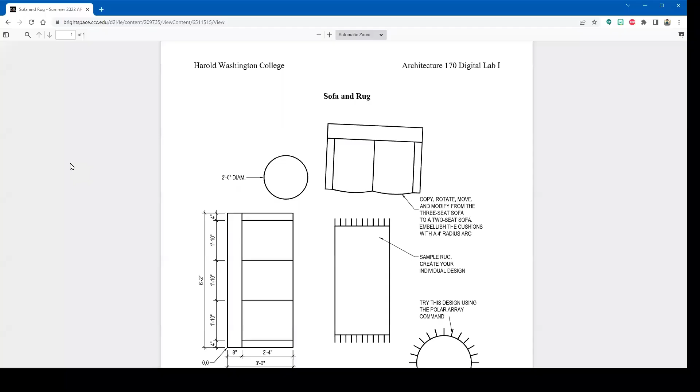The assignment I'd like us to start with is this one, the sofa and rug. My focus is going to be first on this 3-seat sofa. Based on the dimensions of the 3-seat sofa, I'll show you how to copy and edit so you can generate the 2-seat sofa. And then putting in this round end table is straightforward enough.

Being able to put in this rug, I can show you how to do that, but I'd like you to maybe think about a design you want to come up with. And then this one here, I just want to show you how you can use the polar array command for that. So this is the drawing we'll begin with.

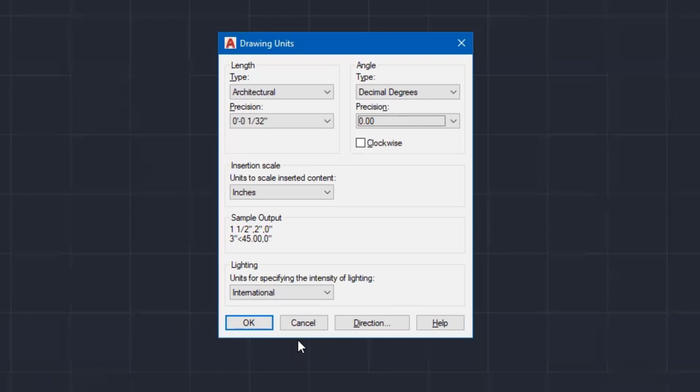Now that we have formatted the units, you'll see down in my drawing aids and my coordinates, it is now showing feet and inches. The next thing to do is save this file as, giving it a file name.

So I will go to my application button, click on it, click on Save As, and I'd like to save this as a drawing. So I click on drawing. It's taking me to my Documents folder. I have an HWC folder, I'm going to double click it. I have an Architecture 170 folder, I'm going to double click that.

I have an old drawing sitting in there, and that's fine. What I'll do now is come down to my file name, click in there one time and provide the file name. Remember, every file will start with your first initial last name. So first initial last name, and please use your first initial last name, not mine. First initial last name space, and this drawing is called Sofa and Rug.

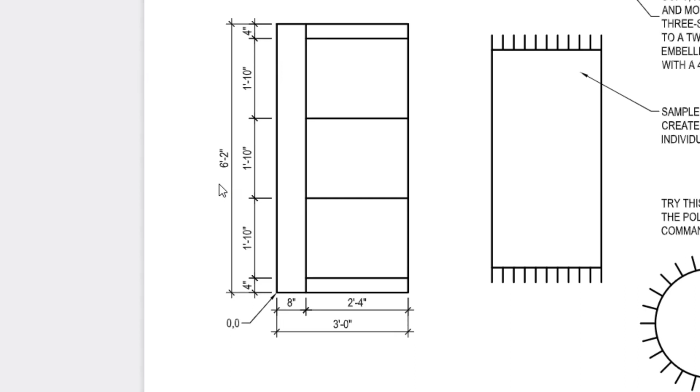So I'll go back to my AutoCAD drawing and begin by constructing the first line. I go to the Home tab, Draw Panel, and click on Line. When I click on Line, it's asking me to specify the first point. And if you notice on the drawing that I provided you, you'll see where it says to begin this drawing, right here where my X and Y are equal to 0.

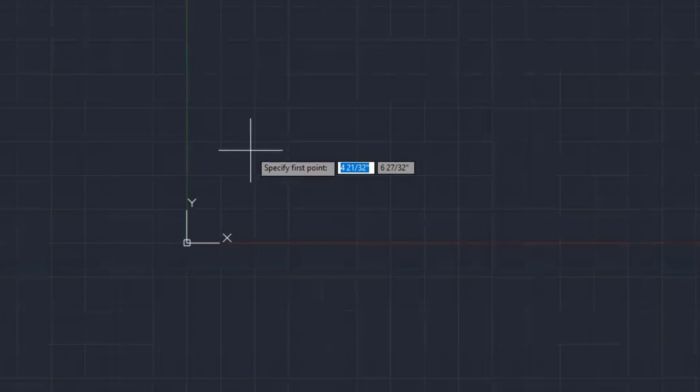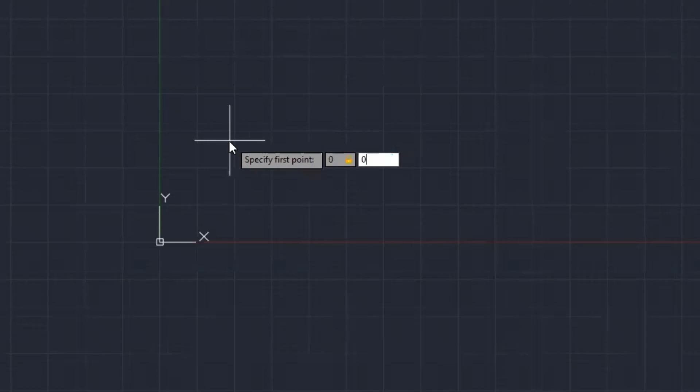That's my point of origin, so I want to make sure that the line begins at 0,0. So when I go back to my AutoCAD drawing, it's asking me to specify that first point, and I'm going to type in the values. So I'm simply going to type 0, comma, 0. I'm being explicit here and indicating to AutoCAD that I want that first point to begin at 0,0. So now I enter, and it guarantees me that the first endpoint of this line is at that point of origin, 0,0.

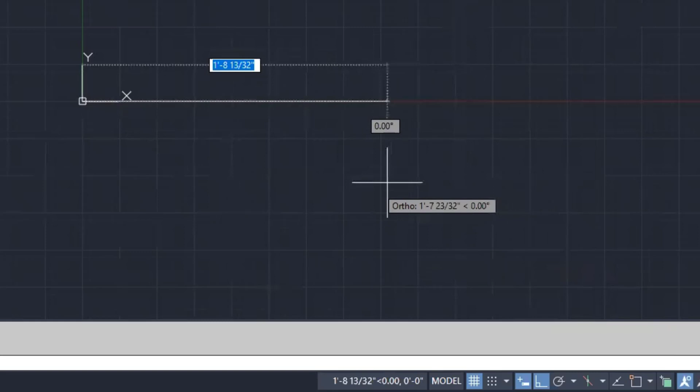The next thing I want to do is draw the line 3 feet in length, and I want to make sure that it is perfectly straight. So I will go down to my drawing aids and toggle my ortho mode on by clicking on the icon. When I click on the icon, it turns blue, meaning it's active, meaning ortho is on. As I move my cursor, you'll see that it moves horizontally no matter where I place my cursor. Now if I come up here, it will go vertical, but it is locked into either a perfectly vertical line or a perfectly horizontal line.

So I'm going to start with my horizontal line here first. And you notice as I move my cursor along, it's updating the distance. When that distance appears to me in the window there and it's highlighted, that means I can go ahead and type in the value. So I want to make sure that this is exactly 3 feet in length.

So I type in 3, and I make sure to use my apostrophe to indicate that it's 3 feet in length. If you do not do this, it's going to draw a line that's 3 inches, and that's going to be detrimental to what you're trying to accomplish. So make sure it is a 3-foot line. So I type in 3 feet and I enter.

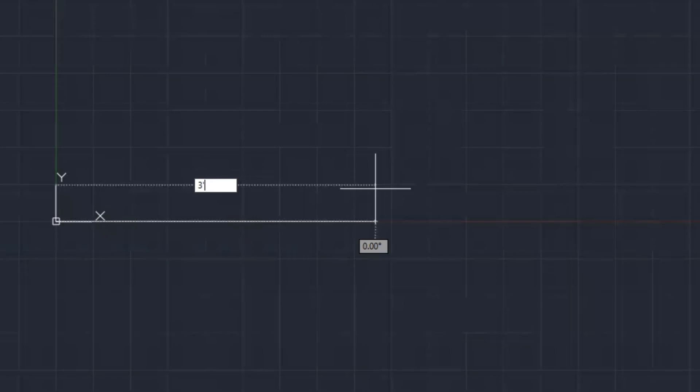And you'll notice that it almost falls off the screen. Maybe on your screen, if you didn't zoom out far enough, it probably did fall off. Don't worry about that—all you need to do is enter. It terminates the command, and you can go ahead and pan the drawing and zoom the drawing so that it is on screen like mine. And now we can begin the next line.

So I go back to my example. The next line I'd like to draw is the one that is 6 feet 2 inches in length, and it will also begin at 0,0. So I go back to my AutoCAD drawing, and I'd like to draw another line.

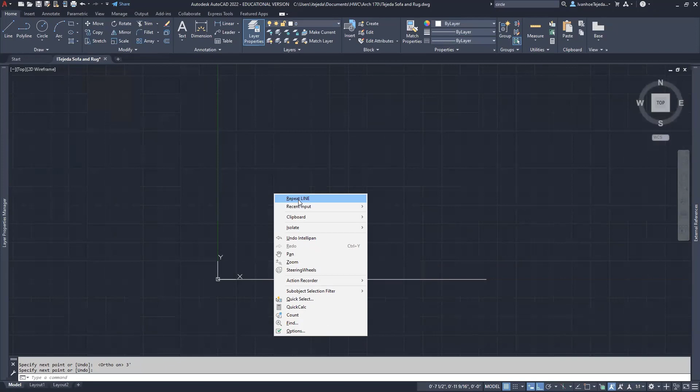Now remember, if I right click, I can go ahead and repeat the line command from here—I don't have to go back to the icon. So I can click on repeat line. It asks me to specify the first point. I'll go ahead and type 0,0, even though there's another way of doing it, and I'll show that to you later. So I want you to practice this—go ahead and type in 0,0 and enter.

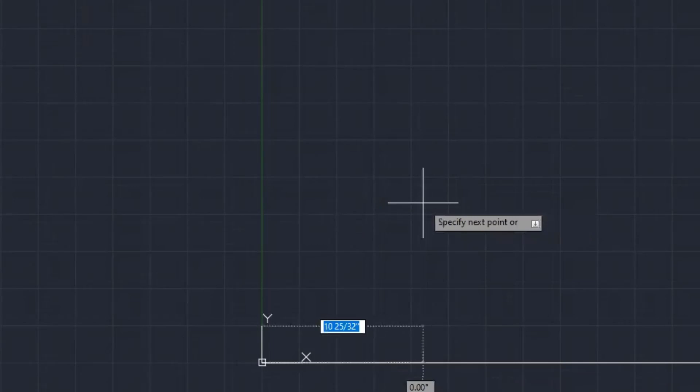And then take your cursor so that it is following that green axis, which is our y-axis, and just take it up. You don't need to take it all the way up or approximate that 6 foot 2 inch length. As long as it's going in that direction and you have ortho on, all you need to do now is type in 6 feet 2, and then the quotes for inches—6 feet 2 inches, no space in between—just like that, 6 feet 2 inches, and enter.

And you'll see how mine falls off screen. And that's okay. I'm going to enter to terminate the command.

Now what I'm going to do is zoom out and pan this down until I see that entire line on my screen like this. You also have the option of zooming to the extents of your drawing. So I can type Z, enter, E, enter, and that shows me the extents. Then all I have to do is roll my wheel mouse down one time, and I get the same results.

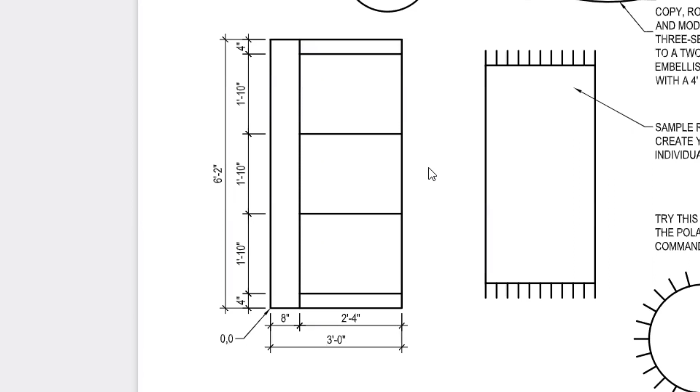All right, with the 2 lines in there, let's go back to our example right here. The next thing I'd like to do is basically complete my outline of the sofa. So I need to construct 2 more lines, but I'd like to introduce some more commands, start to really get into AutoCAD here. So let me go back to AutoCAD.

In AutoCAD, we try to copy as much as we can and then edit. There's no need for me to draw another line. I can simply copy one of the existing lines. So what I'd like to do is copy this line right here over 3 feet this way.

Now I'd like to take advantage of my object snaps. So I'm going to pause for a moment. I'm going to come over here to my drawing aids, and right here where it says object snaps, I'm going to click on the down arrow next to it. First of all, I want all of you to make sure that you have, at the very least, endpoint, midpoint, and intersection checked on.

You check them on basically by clicking on them. So if I wanted to, let's say, turn on perpendicular, I would click on it, but I don't want that, so I'm going to turn that off. So intersection, midpoint, endpoint - make sure you have those. Mine are already set. So the next thing I'd like to do is go ahead and just simply click on the icon itself like this to turn that on.

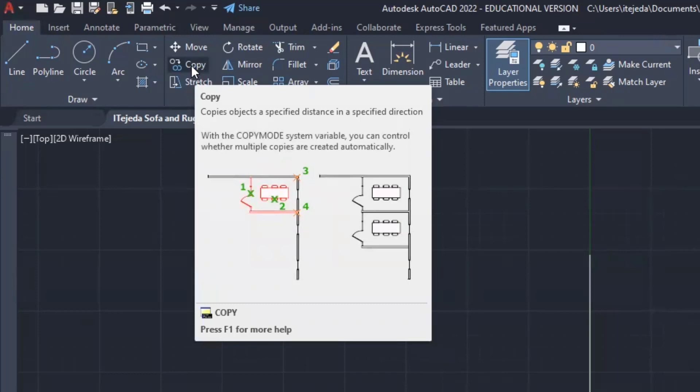All right, we'll go back to my drawing, and I will proceed to make a copy of the line. So from my Home tab, Modify Panel, I come over here to Copy. That tells me that it's going to make a copy of an object from one location to another. So I click on Copy, and then I hover my cursor right here on the drawing screen, and it says Select Objects.

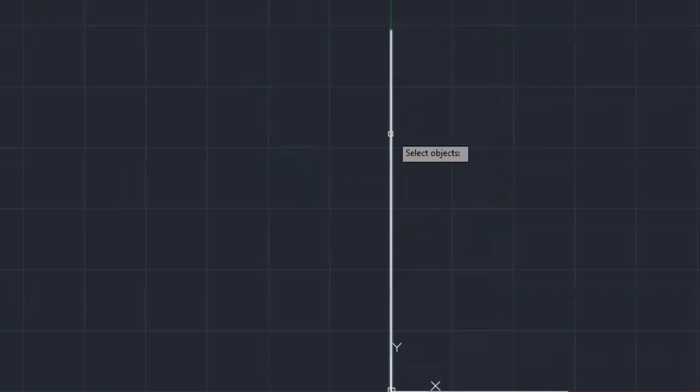I only want to select one object, and it is this line. So I'm going to click, or actually hover over it and see how it highlights. Now that it's highlighted, I can go ahead and click on it. So that is now selected. And if you look down at the command line, it says you have one object selected, right? One found.

All right, that's it. AutoCAD gets stuck in this loop here, wanting me to select additional objects, and I will eventually be selecting more than one, but for now, this is it. I ask you to, in your mind, just say, do I want to select any more objects? And if the answer is no, then enter. So go ahead and enter now. And once you enter, it advances us to the next step.

It's telling us to specify the base point. So for the base point, I'm going to come down here. Notice how if I just hover, it actually has this magnetic effect, and when I hover, it snaps to that endpoint. Once I see that happening, and by the way, it's a square, it's the green square there, I go ahead and click one time because that's going to be my base point.

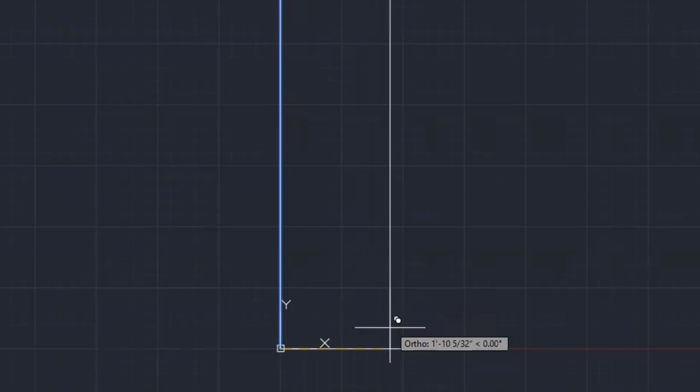Click. And now I'm prompted to specify the next point, the second point. I will simply come over here, hover, hover, hover, and then come really close to that endpoint and let it snap to that endpoint. Once it snaps to that endpoint, it indicates to me that it's the endpoint, and it also has the green square. I can go ahead and click.

Done. It's made a copy. But as you can see, it wants to stay in this mode, and it wants to allow me to make additional copies, but I don't need any more. So I'm going to enter to terminate my command. Done.

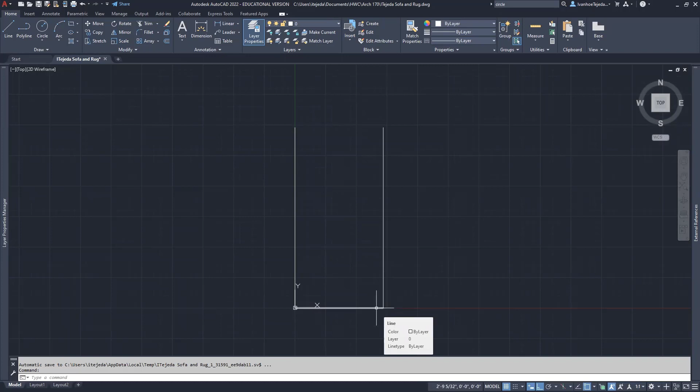I will now proceed to copy this line, the 3-foot line, up to the top. Now, yes, I can draw another line.

Simple and straightforward. I can come over here, right click, and go to recent input, and you'll see that I have the line listed there. So I can click on line and simply draw a line from one endpoint to the other, then right click and enter to terminate the command.

Yes, that is possible, but I'm going to undo that because I want to practice the copy command one more time. There are multiple ways to complete drawings in AutoCAD. With this exercise, I'm introducing you to commands, and then you can practice using different commands with other drawings, and you'll establish your own drawing style.

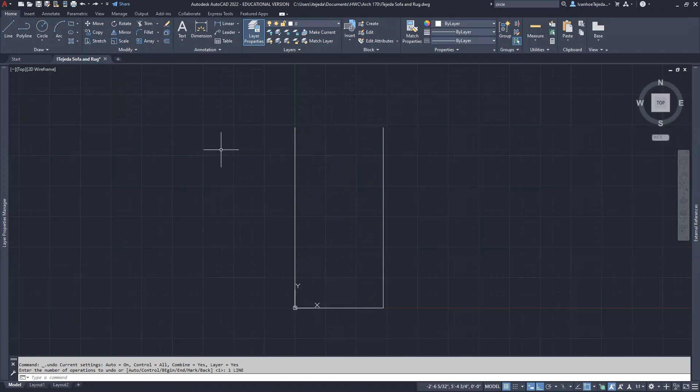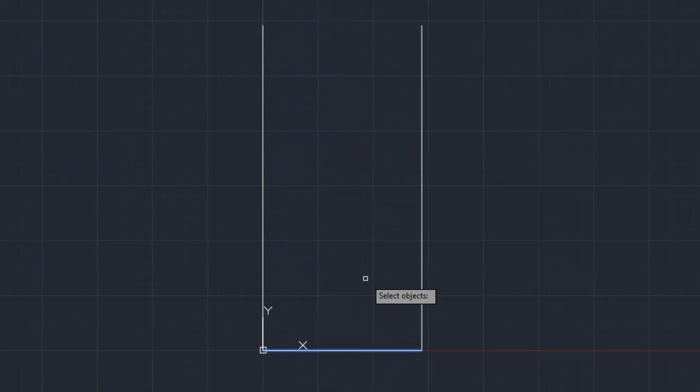So I'm going to right click, recent input, copy. Now I'm prompted to select the object, so I hover over this line and click on it. Do I wish to select any more objects? My answer is no, so I enter. Now, once I enter, I'm prompted to specify the base point.

I will use this endpoint as my base point. Click, take it up, and then click on this endpoint as my second point. Notice how it's still in the loop in case I wanted to make additional copies, multiple copies, and I don't, so I enter to terminate the command. And I now have the 6'2" by 3-foot outline of my sofa.

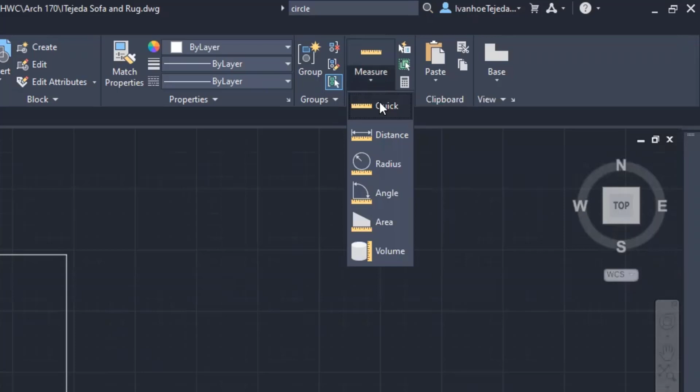To verify this, stay in the Home tab, go to the Utilities panel, and in the measure dropdown, click on that. You'll see there are a few ways to measure your objects. I will select quick.

I'm going to click on it, and when I do that, you notice my cursor changes. As I move over to my 4 lines, it's starting to give me some quick measurements, indicating that it is 6'2" in that direction.

Now if I take my cursor and place it inside of the rectangle, you'll notice that it's showing me the 3-foot width by the 6'2" length. At the 4 corners, it is showing me that they are all at right angles. That means I've drawn this properly. Once I'm done checking that, I can go ahead and escape.

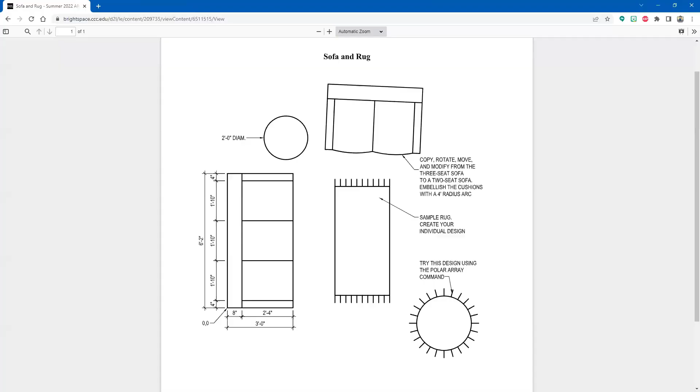Now I can proceed to the next part of the drawing. So I'll go back to my example, and let me zoom in and pan this down a little bit just to focus on that one area of the drawing.

So the next thing I'd like to do is put in that backrest, and that backrest is 8 inches away. That's my focus right now, so I'll go back to my drawing.

Now what I'd like to do is pan and zoom in a little bit, not too much. Actually, I went too far, let me zoom it back out. I can't seem to get it in the middle, so I guess I'll leave it right there. But I really want to zoom in, so watch what I'm going to do.

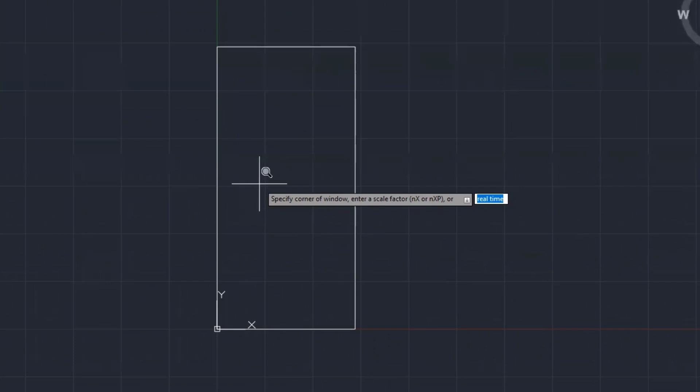I'm going to type Z and enter. Instead of doing extents, there's an option called the window option. By the way, the options you see down at the command line, I can also use my down arrow right now, and it will list them for me right here. And I can click window from here.

So I click window, and it says specify the first corner. So I basically want to say, zoom from here, and I click one time. I move my mouse, then click over here because that's how far I want to zoom in. That's another option you have in terms of zooming.

I'll add the line that's 8 inches away from the back. I could make a copy of this line and bring it over 8 inches. And you know what, I think I'll do that because I still have an opportunity to show you the offset command in just one second. So yes, that's what I'll do.

I will go ahead and go to the Home tab, Modify panel, Copy. So I will click on Copy. It asks me to select the objects, I select the line. Do I want to select any more objects? The answer is no, so I enter.

I can now establish or specify the base point. For the base point, I'll go ahead and click right here. I don't need to click on the object like I did before, I'm simply going to make a click right here, one click. I still have ortho on, and I want to copy it over a distance of 8 inches. So all I have to do now is type in 8.

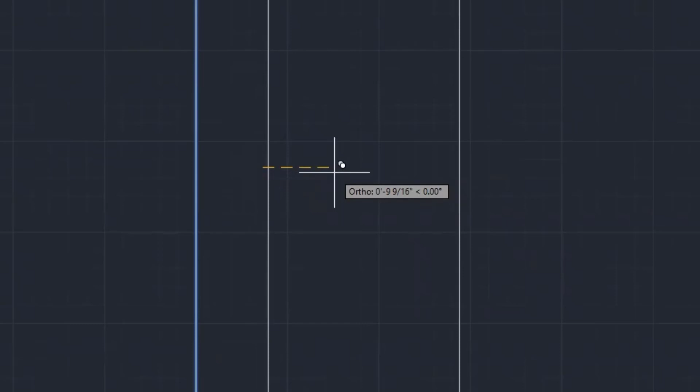I could put the inch mark, but AutoCAD will default to inches if I don't put anything, so I'll simply leave it at 8 and enter. I've copied the line over 8 inches. Now it's assuming I'd like to make additional copies, which I do not, so I can enter to terminate the command, or tap the escape key. This time I'll tap escape, and that takes me out of the command, and I have my line.

I can go back and measure. Right now this is set to quick measure, so I'll click on quick and hover to double check. It shows me that it is 8 inches, and it's also showing me that I have the 90-degree angles at all 4 corners, which is what I want. Now I'll tap the escape key.

Back to my drawing I go, or rather my image. The next thing I'd like to do is add the armrests. The armrests are 4 inches away from the top line and the bottom line. For this, I'm going to use a new command, so I'll go back to my drawing.

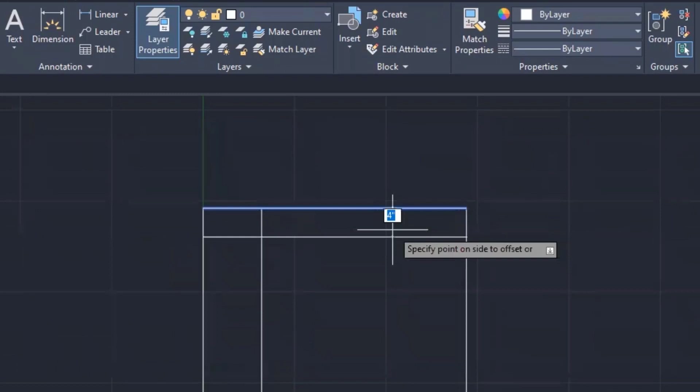Now it wants to know—let me pan this a moment so you can see—do I want to offset it to the bottom, or to the top? The answer is I want to take it to the bottom, and it doesn't matter where I click as long as it is below the line. I can even click way down here, and it's still going to offset at exactly 4. So I click, and the line has been offset.

I'm still in my offset command, so now I'll come down here, select this line, and offset it up. Again, it doesn't matter where I click so long as it is above the line. So I click, and I have that offset.

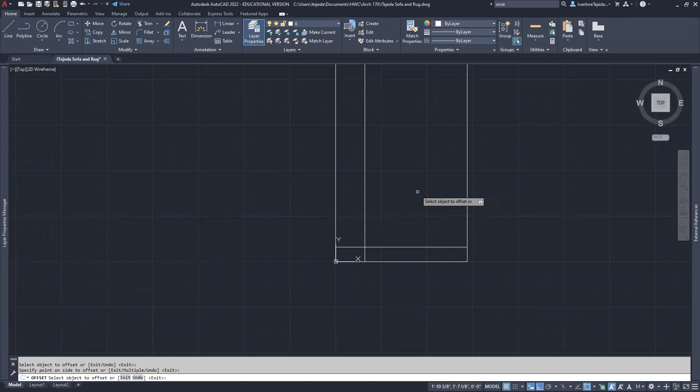Now I'm going to continue with my offset command because I want to show you something. If I go back to my example, you'll notice that my cushions are 1 foot 10 inches apart from each other. I'm already in the offset command, so why don't I just continue and modify that distance? Instead of 4 inches, I'll make it 1 foot 10.

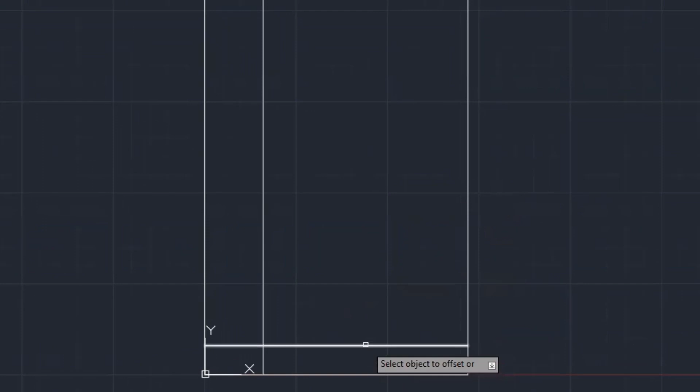While I am still in my offset command, I'm going to click on this line, and I'd like to offset it up, but not 4 inches—I want it to be 1 foot 10 inches. So I type in 1 foot 10, just like that, and enter. It will change that distance for me right there on the fly. So that has been offset 1 foot 10.

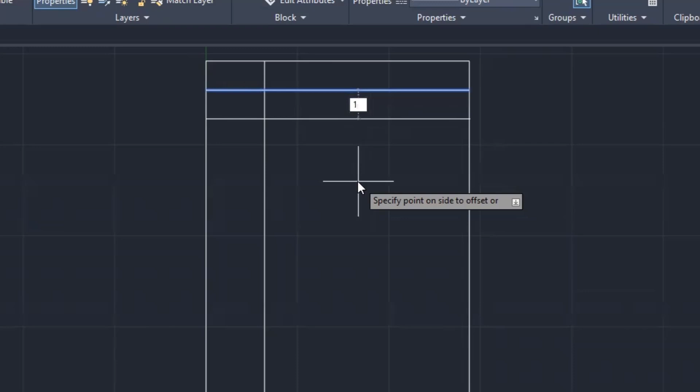I'll do this on the top line. I'll click on it. It wants to default to that 4-inch value, but because that value is currently highlighted in that text box, that means I can change it—I can override it. So I'll type in 1 foot 10 and enter. That's it, I do not want to offset any more objects, so I will enter to terminate the command.

Let's continue. If I look at my example, you'll notice that the lines really should be terminating right here at the edge of this line. They shouldn't continue through. So that's what I will do next—I'm going to adjust that.

So I'll go back to my drawing, and I'm going to introduce another command. This one's going to be another modify command. What I'd like to do is actually trim the segments on this side of the line. So back to my Home tab, back to Modify, and I come over here to Trim. I'd like to trim my objects, so I'm going to click on Trim.

Right away, I'm prompted to select object to trim, or I can also do Shift Select to extend. But I want to trim, so I'll focus on that.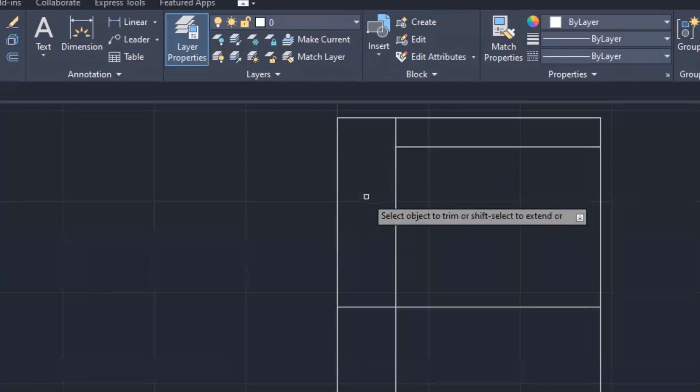All I have to do is simply hover, and as I hover right here, it's already showing me the end result. If I click right now, it will trim the line. So I'll do that, I click. Done. I can do the same and trim the other remaining lines like this. And I'm done, so I can go ahead and hit enter to terminate the command.

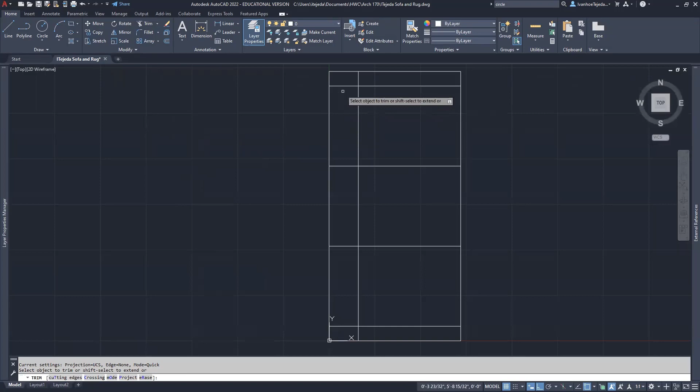Let me show you another way to do that, and it could save a little bit of time. So let me undo, I'll perform the same trim command. I'll click on trim, but this time, instead of clicking on the object, I'm actually going to click just above it, right here in this empty space.

When I click on that empty space like this, AutoCAD assumes that I would like to use what's called a fence line. Notice how if I now take my cursor and move it down like this, it's generating that fence line and wants me to identify the next point. Once I click down here at the bottom, it's going to enact that fence, and I'll click, and it trims all of the lines at once. It's a really nice feature.

Let me show that to you this way. I'll click here for a moment as if I want to trim this line and this line—you see that? And if I were to click, it would actually trim them. But I don't want to do that, so I'm just going to tap the escape key and terminate the command and be done.

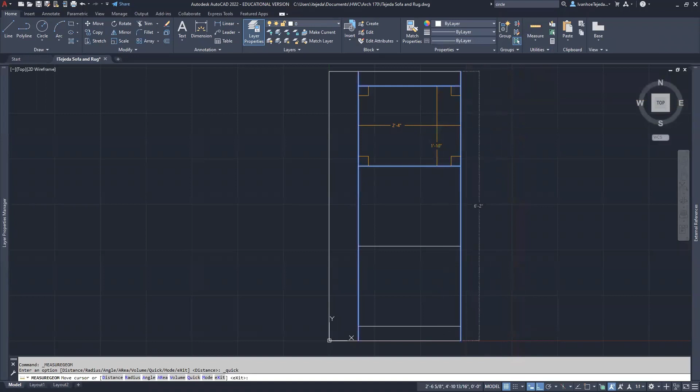So that's my sofa. And then to make sure that I have the dimensions correct, I'll come back over here to measure—it's my quick measure tool. So I click on it, and as I hover, you'll see it gives me the dimensions for all of these lines and how far apart they are from each other. This is my way of just double checking to make sure that I drew it at exactly the 6'2" length, which I do have.

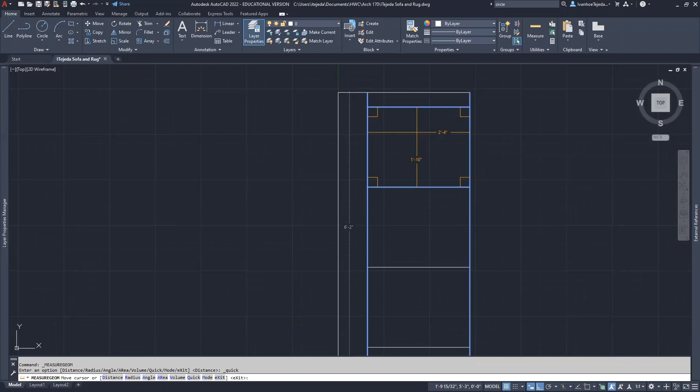If I actually hover outside of it like this, notice how it gives me the 3 foot length, which is nice—it says 3 foot by 6'2" on the outside. So those are correct. This is me just double checking my drawing for accuracy and precision. Every time I go inside of these 4 lines, when I see these rectangular shapes, if it's showing me that every one of those 4 corners is at 90 degrees, then I know that I used ortho properly. And then when I'm done, I simply tap the escape key.

Now I can zoom extent. So I type Z, enter, E, enter. Then I'm just going to roll my wheel mouse down one time and take a good look at this. And that's the sofa. So now that I have my 3-seat sofa, I'm going to go back to my example.

I'm going to go up here. What I'd like to do is construct my 2-seat sofa based on the 3-seat sofa, and I will introduce some more commands here. You'll notice that this one says to copy, to rotate, and move—it's a modification of the 3-seater. So that's what we're going to do here.

So I'll go back to my drawing and I'll take this one step at a time. I'm going to pan this over because what I'd like to do now is make a copy of the 3-seat sofa. To make a copy, I will go to the Home tab, Modify Panel, and click on Copy.

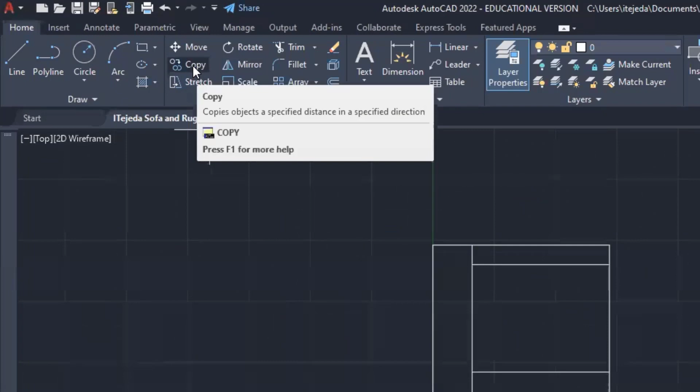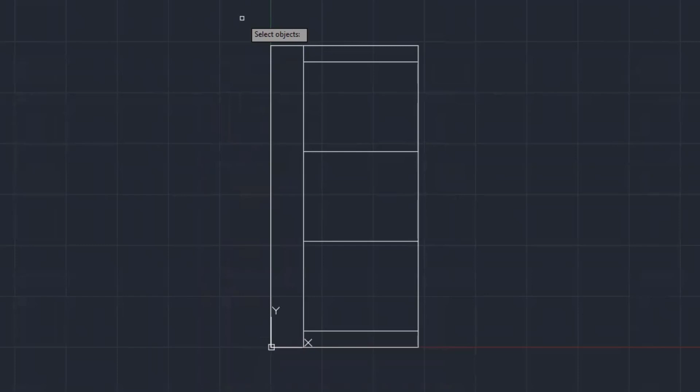Now, to select objects, initially when I went to copy I was actually picking one line at a time. I don't want to do that because it will take up too much time. So what I'd like to do is select all of these objects at once, using what's called an implied window. I'm going to click up here away from my objects, one click, and then move my cursor.

Notice how, first of all, it is a blue shaded area, and the outline of that area is a continuous border. Anything that falls 100% inside of this implied window will be selected. Now, if I put my cursor right here, you'll notice that the three long lines do not fall 100% inside of the implied window, so they do not get selected. So I have to make sure that I bring everything inside. I'll go ahead and click.

That has allowed me to select all of my objects, and down in the command line it says I have selected 9 objects. I do not want to select any more objects, so I press enter to complete my select objects command.

Now it's asking me for a base point. The base point I'm going to pick is just somewhere in here. It doesn't have to be anywhere specific. If you feel comfortable, you can pick an endpoint or a midpoint, but I don't need to do that. I'm okay picking it right here, so I make one click and then just move it out here.

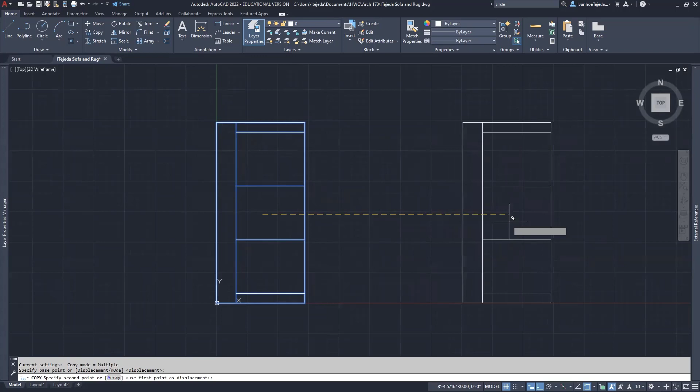As you can see, ortho is still on, and that's fine. I want to bring it out far enough because I know I'm going to rotate it, and I want to give myself enough room. So I'm going to extend it just a little bit more and make the copy right here, and click. When I click, I'm still in copy mode, and it wants to make more copies. I'm going to enter to terminate the command. Done. So I have successfully copied my 3-seat sofa so that I can convert it to a 2-seat sofa.

So that's step number 1. Step number 2, I'm going to rotate it. I want to introduce the rotate command, so I come over here to the Home tab, Modify Panel, and click Rotate.

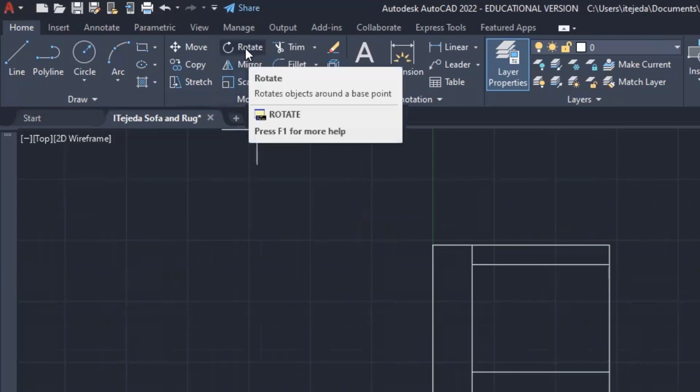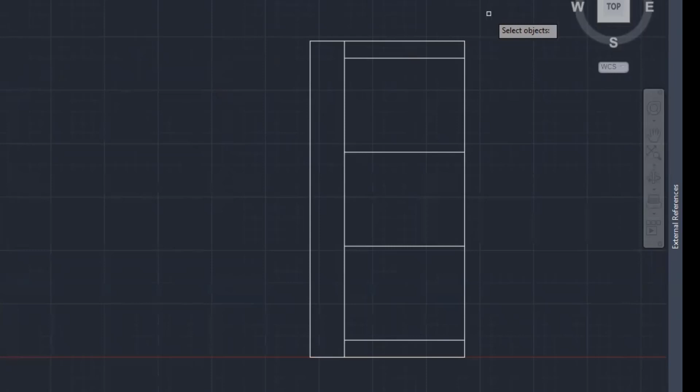Once again I'm prompted to select objects. Now, the last time I selected objects I used an implied window. This time I'd like to show you what's called the implied crossing window. I'm going on the opposite side, on this end, and I click one time. As I move my cursor from right to left, it's now a green shaded implied crossing window, and the outline of it is dashed. That means any object that simply crosses through this window will be selected.

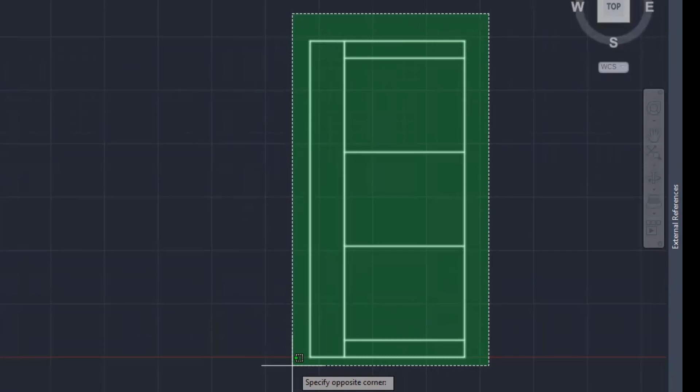And just like that, I've selected 4 lines. All I need to do is come straight down here and pick my other lines, and we're good. I just wanted you to see the difference between the implied window and implied crossing window. I will now click. I've selected my objects. Do I want to select more objects? No, so I enter.

Now for the base point, it doesn't matter where I select, but this is going to be my point of rotation. This time I'll pick the midpoint here, just to be different from last time. So I pick this midpoint and then move my cursor. But as I move it, notice how it's jumping around too quickly for me, so I'm going to turn ortho off for just a second. I'll come down here to show you what it's actually doing. It's allowing me to select that rotation angle.

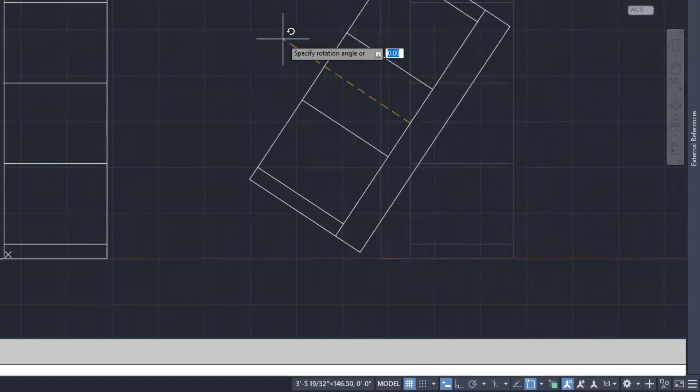I'd like to rotate it to this position, so I'm going to turn ortho back on and make sure my cursor is down here. I turn ortho on, my cursor is right here, and I know it's going to be perfectly straight, and that's what I want.

So I click, and make sure you click away from the objects, because if you accidentally come over here and click there, it's actually going to pick that endpoint. You'll get an angled rotation, and you don't want that. So stay away from your objects, and if you have to, pan down some more and bring it down further before you click.

This command ends itself because there's no more to do. So I go in, rotate, and it takes me right out. So I've accomplished that much.

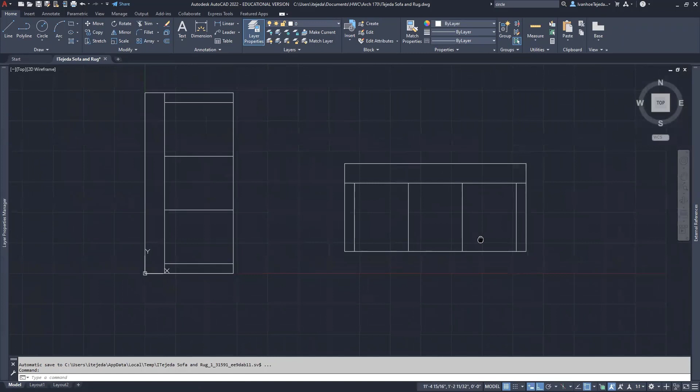Now I'm going to take my screen and zoom in right here and just focus on this 3-seat sofa. I don't want to get confused with that grid, so I'm going to turn that grid off just to help me out a little bit. And there, that clears things up a bit.

I'd like to now have a 2-seat sofa. If I go back to the example, you'll see that for the 2-seater I did not provide dimensions, but know that those cushions are still 1 foot 10 inches apart, and all of the other dimensions apply as well.

With that in mind, I'm going to show you a couple of different ways to do this. My first example, the first way I would do this, is to move this line. So I come over to my Home tab, Modify Panel, click on Move. I can select this object, then enter. I'm going to move it from this endpoint, and bring it over to this endpoint here.

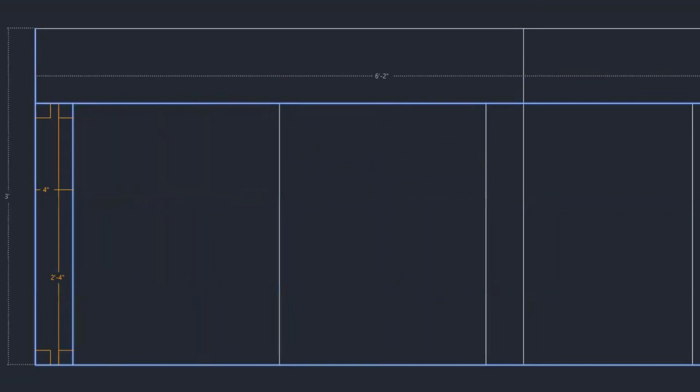And you can see the 2-seater, and I want to make sure that both cushions are 1'10". So I'm going to do a quick measure here. All right, 1'10", 1'10", 4-inch armrest, 4-inch armrest. I'm good. Tap the escape key.

And now all I need to do is trim. So I'll go back to the Home tab, Modify Panel, Trim. And I'm not going to trim them individually. I'm going to click right down here in an empty space, and I'm going to make one click, take it up. It's going to give me the fence. And now I click, and it has trimmed that off, and I enter.

Now, it left some lines behind. All I have to do now is erase them. So here's what I do. I basically just highlight all of them. I window them like this. That highlights them. And then I just tap the delete key on my keyboard.

Or I can go ahead and be very formal about it and go to my Home tab, Modify Panel, Erase. And when I click on Erase, it asks me to select the objects. I make a window, an implied window like that, and I enter. And they're gone. And that gives me the 2-seater that I wanted to have. So that's one way to do it.

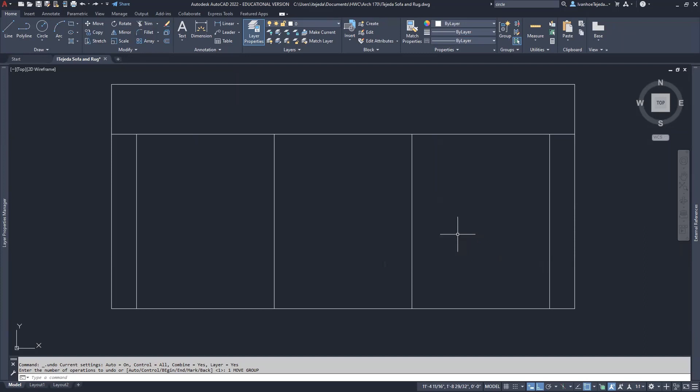Let me show you another way. So in this case, I am going to stretch my lines. And I know in advance that I'm going to have a line on top of another line. So I will jump ahead and erase. So I'm going to take this line right here, and I'm going to either tap the delete key or just come over here and click on erase, and it goes away.

Now I'm going to stretch. Home tab, Modify Panel, Stretch. So I click on Stretch. You'll notice in my command line, it's telling me to select objects to stretch by using a crossing window or a crossing polygon. So I have to remember a crossing window goes from right to left. If I go in the opposite direction, it's going to give me an implied window and it will not work. So I have to make sure to make a crossing window.

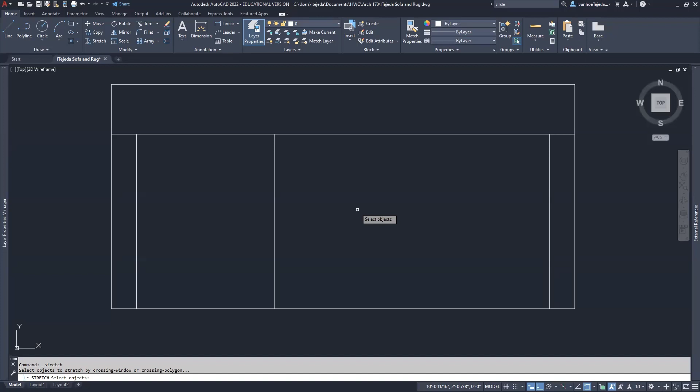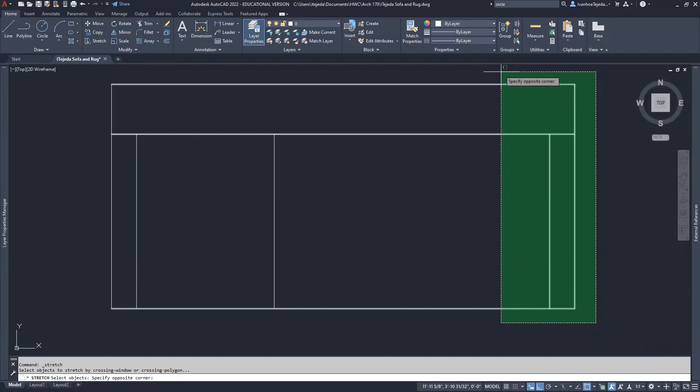So I'm going to start down here in this corner because I know that my next corner is going to be to the left, and that's what I need. So I click one time right here, and now I come over, and you can see it's an implied crossing window because it is shaded green and it has the dashed outline. So now I click. And what it has done is it's selected the lines, but it has also selected endpoints of the horizontal lines.

And they're going to get stretched over in just a moment here. So I don't want to select any more objects, so I enter. And now watch this. I'm going to pick from this endpoint. I want to stretch it over to this one. I'm doing this on purpose because I know that that is exactly 1 foot 10. So by doing that, by using my endpoint to endpoint, I guarantee that it is the correct distance. So now I click and I have my 2-seater.

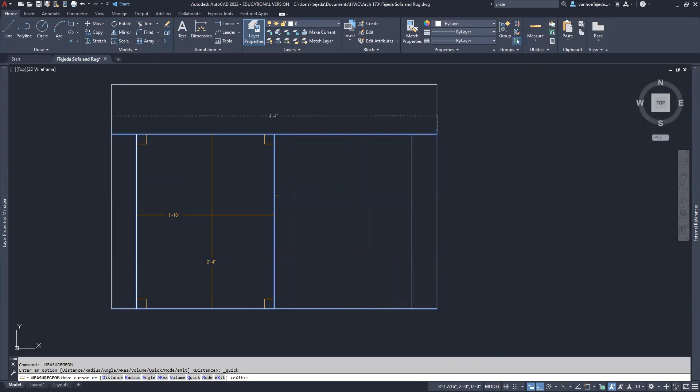Double check it again, measure it, and I have the dimensions that I need to have. Tap the escape key. Now go back to my example.

And you'll notice that in this case, I indicate that we can embellish the cushions with a 4-foot radius arc. So I'll show you how to put that in. So I'll go back to my drawing. And I don't need the lines here anymore. So I'm going to trim them. So I go back to trim.

And I select this segment of the line, and then I select this segment like that. Notice how I didn't click right on it, so it automatically went to a fence, and I just took the line straight down so it would cross through the segment. All right, so I'll enter now.

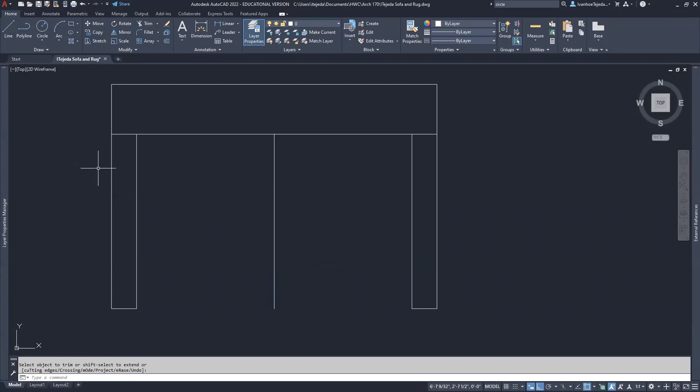And now, again, back to my example. I just want to make sure I have this right. Embellish the cushion with a 4-foot radius arc. I will now go to my Home tab, Draw Panel, Arc. And I need an arc that will give me a radius. So I want a start point, end point, radius. And this is the only one that gives me that radius option. So I'm going to start that. So I'm going to click on it.

Start, end, radius - rule of thumb here, something I should have mentioned. When I go to draw arcs, let me show you this real quick, like a 3-point arc. If I start here and pick my next point there, you'll notice how the arc wants to draw itself in a counterclockwise direction.

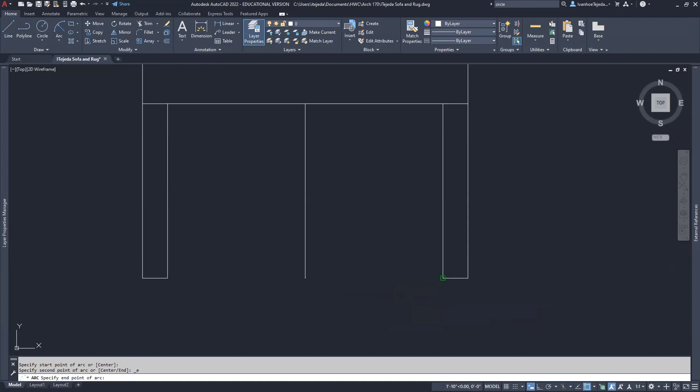Go to arc, start, end, radius. This time I'll start it here, and then end it there. Now I'll give it the radius, type in 4 feet and enter. There we go.

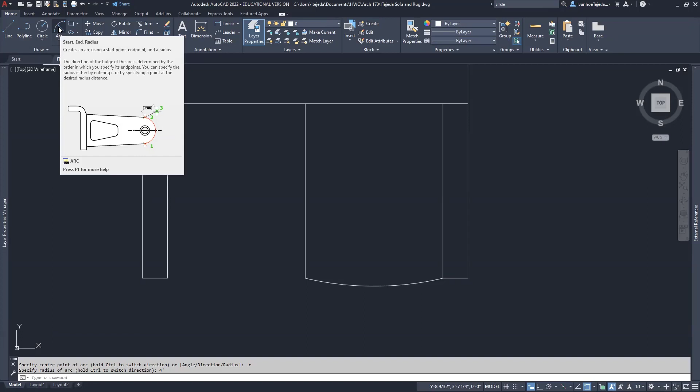One more time - if I just hover, it shows me that if I click now, it will go with the start, end, radius option. So I'll click that, start on this end, one click for my start point, one click for my end point. Notice it doesn't show me anything when I'm really close, so it's a good idea to move that cursor out of the way. Now I type in 4 feet and enter.

Now I'm going to pan and zoom, and I can see where I have my sofa, but I'd like to move it up to this location. So I'm going to move. You notice I've been going to my icons quite a bit, and that takes time.

I prefer the keyboard. A lot of these commands have what are called command aliases, which nowadays are called keyboard shortcuts. The alias I want to use is M for move. So I type M, and it pops up right away, showing me that's the keyboard shortcut for move. I type M and enter.

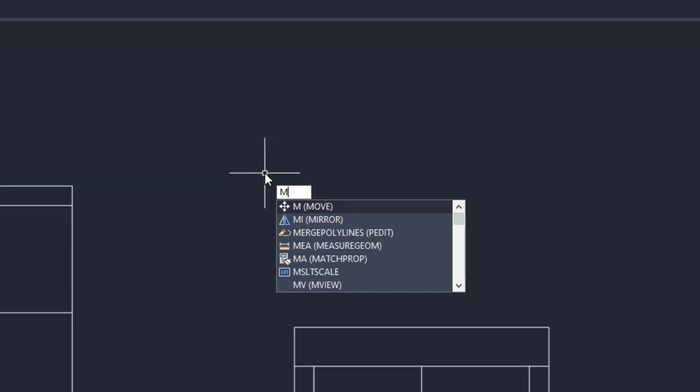And now I select my objects. Let me review this one more time. I'm just going to click up here - if I make one click, right? And if I take that cursor and move it over to the right, left to right, it is a window, no matter which way I go.

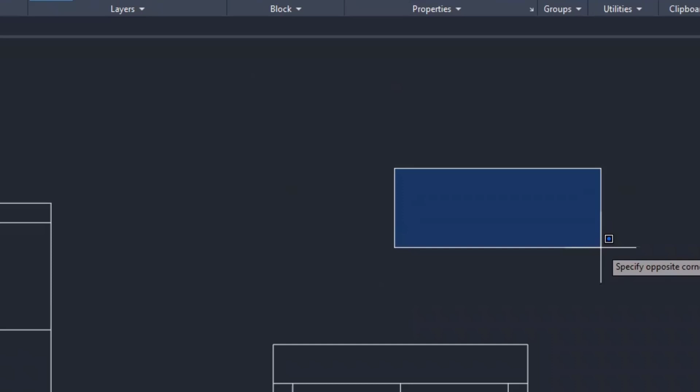But if I go to the left, now it's a crossing window - to be specific, an implied crossing window, and this is an implied window. So you decide, think ahead and say to yourself, all I really need is a window. So I know I want to go from left to right, and I'll just click and finish this.

It doesn't select any objects, but it keeps me in the select object mode. Now I know I can either go from this corner down, or from this corner up. As long as I'm going from left to right, I click one time, take it over, fit everything within that implied window, and click to select all of my objects. You'll get the hang of it if you continue to practice.

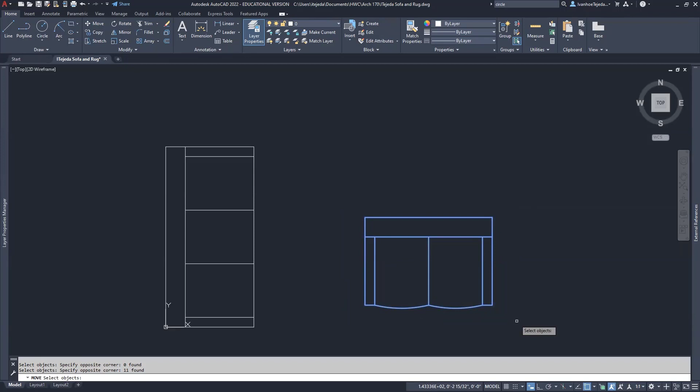Now that I have my object selected, I enter. I take a base point - I'll pick this as my base point - and move it up. Ortho is off; if yours is not off, go ahead and turn it off and locate it somewhere up here. I'm going to pan while in this command and take my sofa and place it somewhere right here.

Now if I go back to my example that I showed you, you see how it's turned a little bit, just to give it a little bit of a lived-in feel. So it's an opportunity to practice the rotate command again.

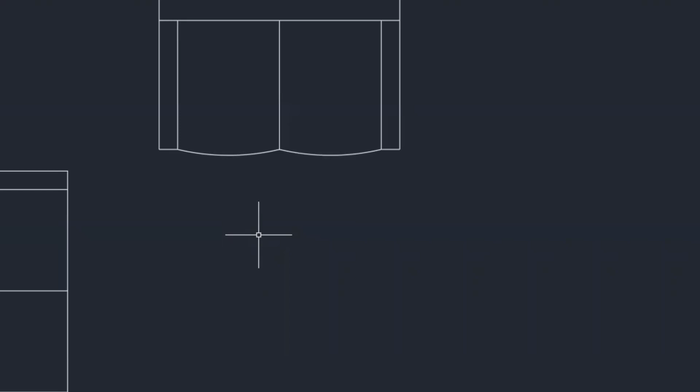So I'll rotate, but I want to show you the keyboard shortcut - that would be RO. RO is the keyboard shortcut to rotate. Now I enter, and it says select the objects to rotate.

I previously moved all of those objects that represent my two-seat sofa. I don't need to pick these objects again - all I have to do now is type P for previous. If I type P and enter, it remembers the previously selected objects. It's a little trick in AutoCAD.

They're selected. You don't have to use the P - you can go ahead and just draw a window around them. So those are the objects that I want. I enter, and now for my base point, I'll pick this point right here. Then to rotate, I will just freely rotate it about that angle, either here or here.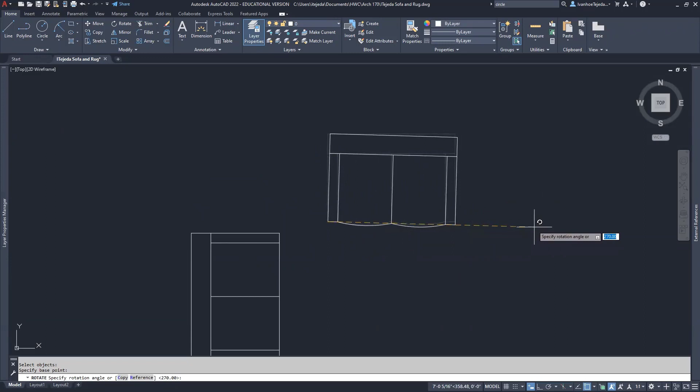You pick it - it doesn't have to match exactly what I have. So right here, maybe just a bit. There we go. Then I'm going to pan and zoom - you notice how it has that nice look. You are more than welcome to change this 3-seat sofa and put the same 4-foot radius arcs on there if you wanted to, to make further embellishments.

I'll go back to my drawing now. And I have a table, and then I have my rug to put in.

What I'd like to do for now is put the table in there, and then I want to show you how to print this out so you at least have that much completed. This is going to be a 2-foot diameter round table.

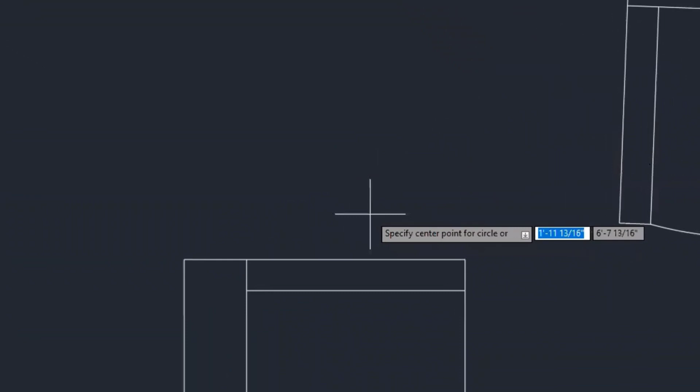I'll go back to my drawing, go to my circle option drop down, and pick center diameter this time. I click on center diameter, pick a point, and I'm going to do this on purpose - I'll accidentally pick it a little too close to the furniture there. So I click right here, and then I want to draw a 2-foot diameter, so I type in 2 feet and enter.

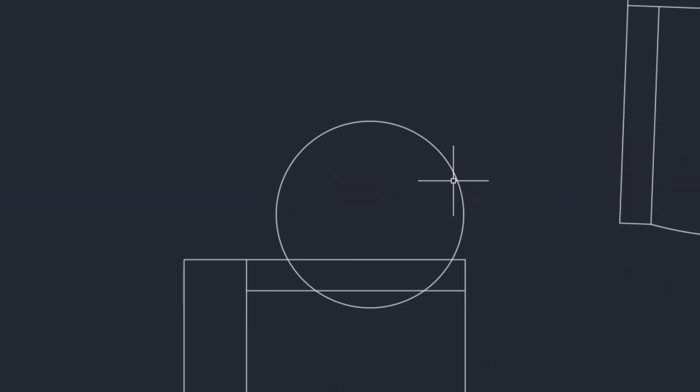And yes, it's right above the other object. I did this on purpose because now I can move it, but I want to show you another way to move this. If I select the object, you'll notice these blue square dots appear - these are called grips. A circle has grips at every one of the 4 quadrant points, and also at the center.

So instead of using move, I'm going to use the grips, and I'm going to pick this center point and click on it. That will allow me to stretch the circle. Now it sounds strange - how do you stretch a circle? I'm not; it's defaulting to moving it to another location. So I can move it over here and click.

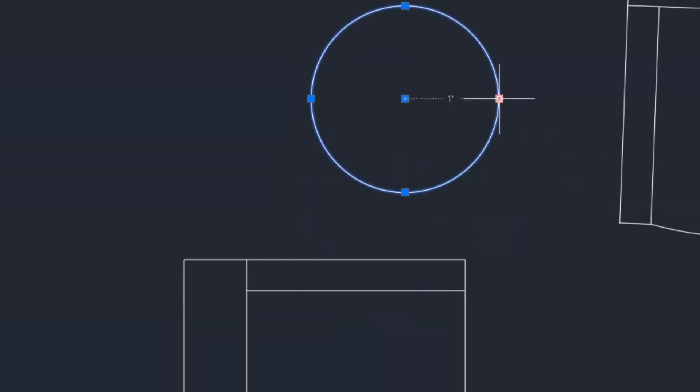That's it. If you wanted to, you can click on this quadrant point - it shows me that it's 1 foot out. I could make this bigger or smaller just by using the grips and typing in a different value, but I'm not going to do that. I just wanted to show you that, and I'll tap escape. Then to remove the grips so it's no longer active, I tap escape again.

And then I will zoom extents, so I type Z enter, E enter, and I have that. I have not finished this drawing. On your own, finish doing this sample rug, and I will show you how to do this with the polar array - don't worry about that just yet. But go ahead and do your own rug now that you've learned how to use a few of these commands. I do want to show you how you would print this.

So I'm going to come back over here and quickly walk you through the process of printing this out. First, I will zoom extents - it's very important, before you print something out, always zoom extents. So Z enter, E enter. That way you know if anything is floating out there, you'll be able to see it. This is the extent of my drawing, and that's what I wanted to see.

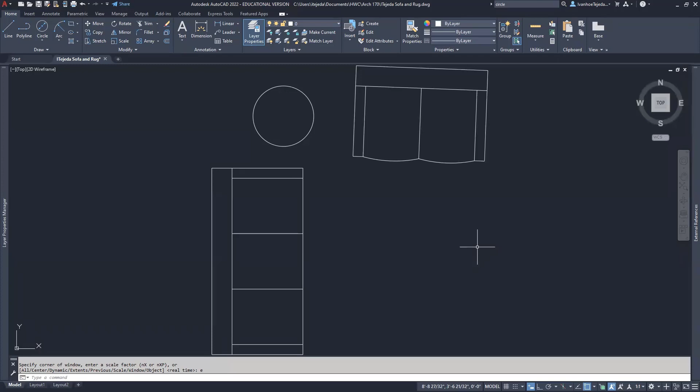Next, I want to come over here and print this out, so I'll go to my application button, hover over print, and click plot. Print and plot are synonymous in AutoCAD. This opens up my plot dialog box, and we're going to take this one step at a time.

First of all, don't worry about page setup - we're going to jump over to printer plotter. We need to select this, and we need to output a PDF. Click on the dropdown and look for the AutoCAD PDF General Documentation option, and pick that one. This will make sure that we output a PDF.

Now the paper size is going to be 8.5 by 11 - that's fine. What to plot? Remember I did a zoom extents - I want to make sure that I plot the extent of my drawing right here. Next, under plot offset, I want to center the plot.

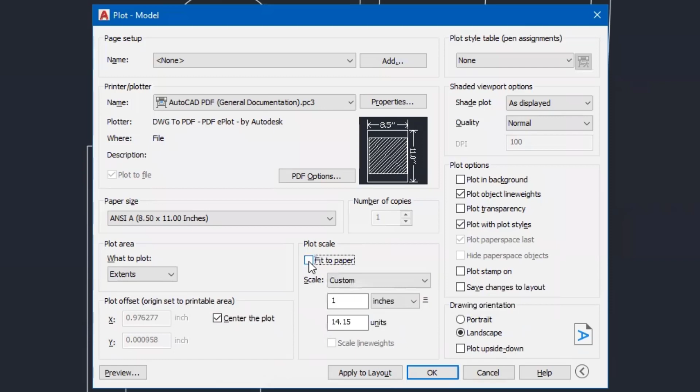And then I want to come over here where it says plot scale, and I want you to start getting into the habit of plotting to an architectural scale. So I'm going to turn off fit to paper, and the scale I'm going to select from this list. I'll click here, and it shows me a lot of different scales, but I want to come down here to my architectural scales.

I'm going to see what happens if I select 1/2 inch equals a foot. I'll click on it, and you'll notice in my preview that it's showing me on an 8.5 by 11 sheet, if I print this drawing out, which I drew at actual size, scaled down to 1/2 inch equals a foot, that's how much space it will take up on the sheet.

So could I go a little bigger? Let me see. If I change it to 3/4 of an inch, it still fits. So I'm going to let you decide if you want to go 3/4 inch or 1/2 inch. There's no right or wrong here, I just want to make sure it's to an architectural scale. If you can't decide, go with the bigger size, 3/4 of an inch equals a foot.

Now I'd like you to apply to the layout. That way these settings are saved, and the next time I come back and want to print, everything is already set up.

Looking at the drawing orientation, it's going to orient it to landscape, but if I click to portrait, it just changes ever so slightly. I think I do want portrait, just to make sure my sheet of paper is 8.5 by 11, but it's not going to matter for our purposes.

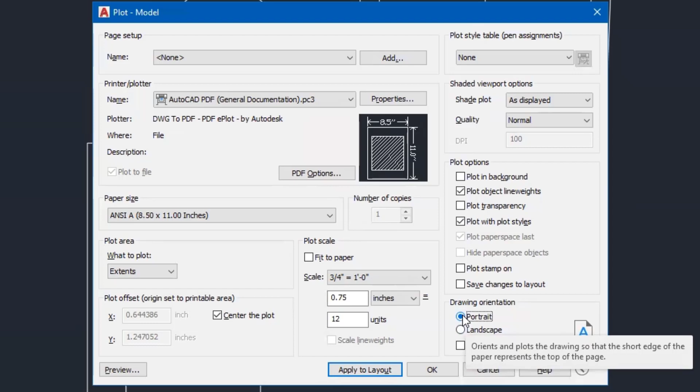Now that you've done all that, you'll notice I made one change here, so I can apply to layout again because I made a change. I want to make sure I can save that, so I'll click apply to layout once again.

Now I can preview this. When I click on preview, it's going to give me this warning telling me something about an annotation scale. We're not there yet, so don't concern yourself with this—just go ahead and click continue.

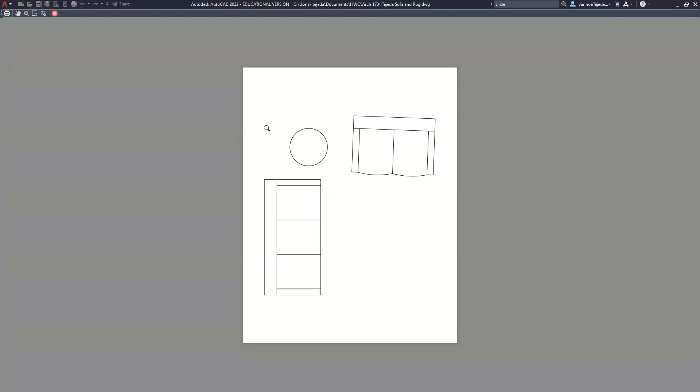What it's showing me here is an 8.5 by 11 sheet size, at a 3/4 inch scale, showing what this looks like on that piece of paper. If I want, I can zoom in just by clicking and dragging my mouse up to get a better view of it.

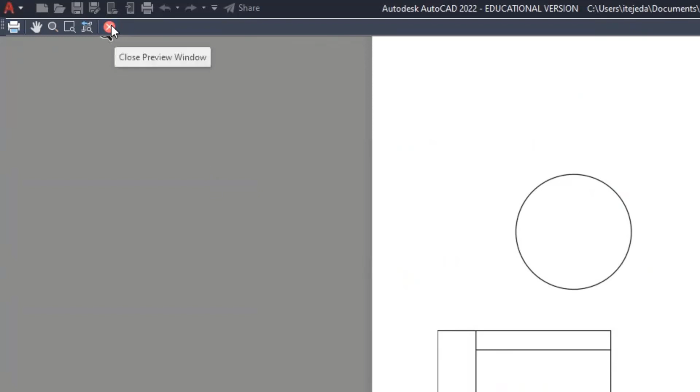And if I like what I see, I can go ahead and simply click on plot. But if things weren't looking right, I can close out of the preview window and come back in here to make changes. You can change the scale if you wanted to, but everything looks okay, so I'll proceed and click OK.

Same message again. If any of you want to, you can always continue under these conditions and it won't show up again, but I'm going to keep mine going for a couple more sessions. I'll go ahead and continue.

It's asking me where I want to save this file. I'll go into my HWC folder, then into my Arch 170 folder, and print this out to this location.

You'll notice it's adding additional text where it says model. The reason is because we are in the model tab, which is model space. I want you to remove that—just click out here and backspace until it shows only your first initial, last name, and the name of the file. Once you have that, go ahead and click save.

It tells me it has plotted the sheet. If I open this up in Acrobat on my computer, there it is. I'll close this preview—there's the drawing. I'll look for this on your Google Drive.

What I usually do is come down to this corner, and as I move closer, there we go—it tells me it did print on an 8.5 by 11 sheet, and I'll be able to tell the scale. I'll check your drawing also by opening up the DWG, and when I open it, you will have saved those settings, and I'll be able to check them. So that's how you will print it.

Something I forgot to do with my drawing, and should have been doing regularly, is save. As we say in practice, save and save often—I should have done that. Another way to save is to use Control S, typical of a lot of Windows programs. So that's the drawing saved.

I'll close out of it and come back later to add the rug. You don't have to finish it all in one sitting—you can give yourself a little bit of a break.